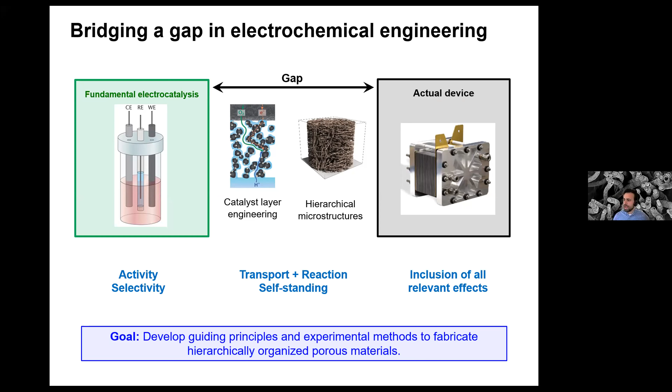That is a problem on a length scale where chemical engineers feel very comfortable. Our goal is to develop guiding principles that would allow us to fabricate and characterize porous materials for next generation electrochemical systems. The polarization curve is the typical footprint of an electrochemical reactor. Tom was particularly discussing the kinetic overpotential. Theoretically, we would have a thermodynamic voltage called open circuit voltage, but in reality, as our current increases, the cell will experience certain inefficiencies or losses. In electrochemistry, we like to group them into three categories.

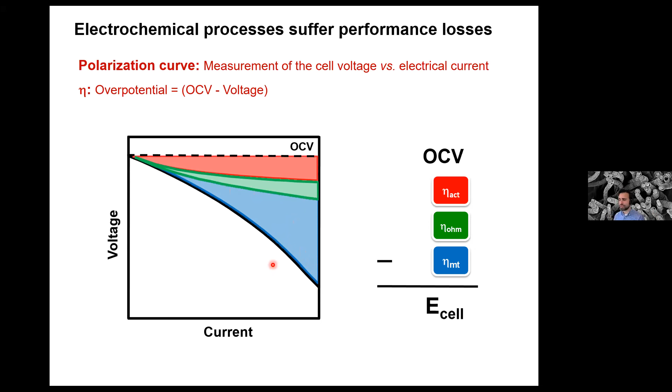The first one is activation overpotential, related to electrochemical kinetics, so surface area and activity. The second one is ohmic, which has to do with ionic conductivities in your cell and also electronic conductivities, contact resistances, conductivities in solids. And last but not least, mass transfer overpotentials. Those become very relevant at very high current densities. There, the porous electrode plays a crucial role because it should distribute reactants at the same time that it is removing products. So there is a lot of interest to develop three-dimensional electrodes and coatings to control mass transport.

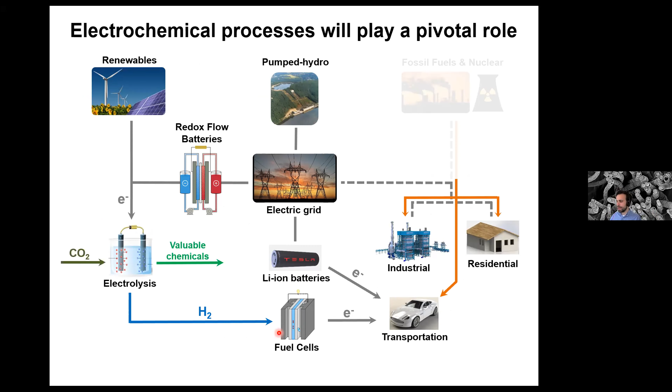And really the vision is this one. You're all familiar with it, so I will not spend time: integrating renewables through large-scale energy storage, electrochemical conversions, and use in transportation sectors. Today I want to tell you three very short stories of how we can engineer porous electrodes to enhance the performance of electrochemical systems. I will first start with an example of low temperature fuel cells, because a lot of the science and engineering developed for fuel cells is much more mature than the science being developed in CO2 electrolysis.

And I think there are a lot of interesting ideas that can be repurposed from fuel cell technology into CO2 electrolysis. I will tell you a very brief story of our recent efforts on CO2 reduction, particularly on thinking about how to make gas diffusion electrodes. And last, I'll tell you a brief story about how to control 3D porous structures for redox flow batteries.

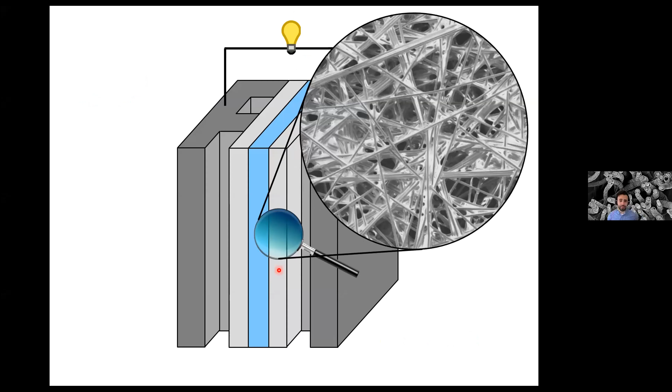Okay, so let's start with the first story. And before I start, I wanted to remind you how a polymer electrolyte fuel cell works. In the anode, we have hydrogen gas. In the cathode, we have oxygen from the air. And we produce water, electricity, and heat. Now, the problem is that on the cathode, at high currents, you produce a lot of water. And this water has to leave the cell at the same time as the gases are coming into the catalytic area. So that is what we call mass transfer limitations.

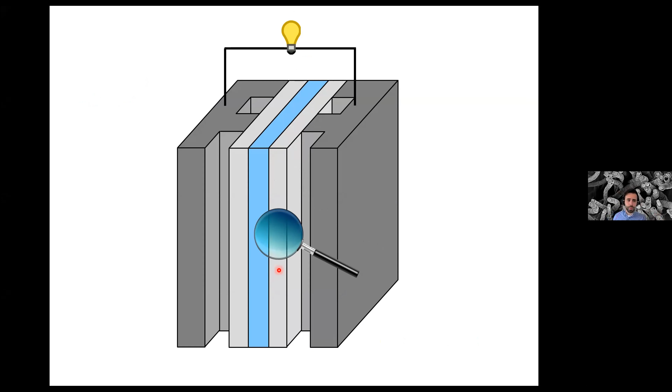And it's a very relevant problem, a very important problem in fuel cells called water management, but also in electrolysis, if you think about bubble management. And if we think about CO2 electrolysis, if we want to generate, for example, organic products, I suspect that this will also become a problem in the near future, particularly if you want to go to high currents.

So on the cathode, what we have is typically a membrane, then a catalytic layer here, and then we have these gas diffusion layers or gas diffusion electrodes that I'm sure you're all familiar with, which are composed typically of carbon fibers and then a hydrophobic coating, typically PTFE, Teflon, yeah? And the reason why you put in a hydrophobic coating is that the water or the products can come out as quickly as possible.

Now we know from experiments and theory that the water at the micrometer scale will follow these tortuous paths, which are determined by the material microstructure and the local surface chemistry. Now, in chemical engineering language, this is what we call decreased effective diffusivity, because the gases are forced to travel longer distances, increased tortuosity, right? So how can we rethink this problem to try to channel the water and the gases in a way that they follow straightforward pathways at a micrometer scale?

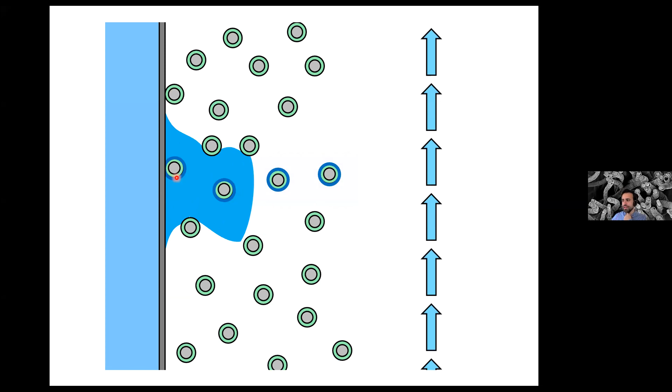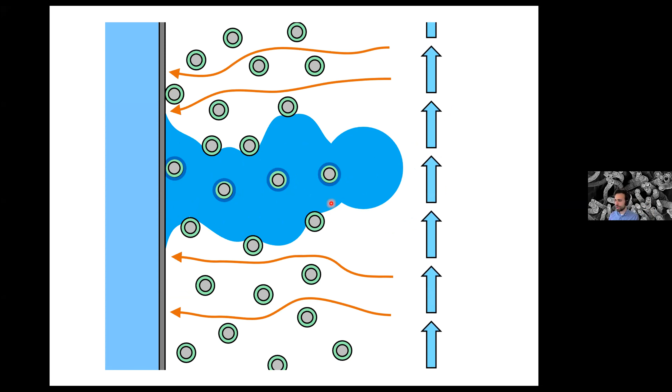And that is really what we've been thinking about for some time: can we change the local wettability of these gas diffusion layers or gas diffusion electrodes to force the liquid product, in this case water, to travel through these straightforward pathways? And as a consequence, the remaining areas will stay dry for the transport of gases, okay? So this is a fundamental problem. The fundamental challenge is really controlling multi-phase flows at a local scale. And how to do that, that's challenging because it requires modifications of contact angles and wettability through thick materials.

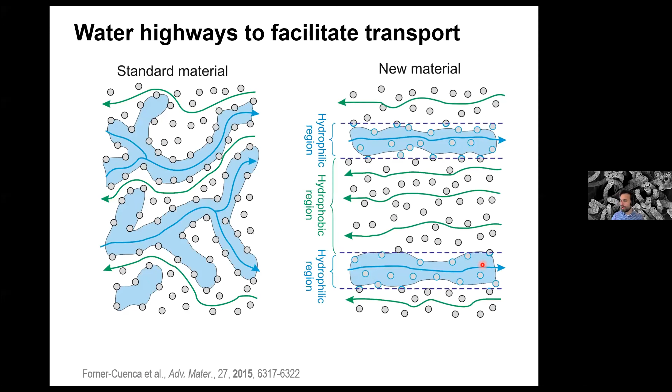And this is the only equation I will use today, which is the driving force for a liquid product when there is a gas counterflow, the capillary pressure, that can be calculated as 2 times the surface tension multiplied by the cosine of the contact angle, and the contact angle tells you something about the wettability. So a contact angle higher than 90 is hydrophobic. Contact angles lower than 90, that is hydrophilic. And it also depends on the pore radius. So as we would logically expect, the water is going to preferentially fill the pores that are hydrophilic and that have large radius, okay? Because the capillary pressure is lower.

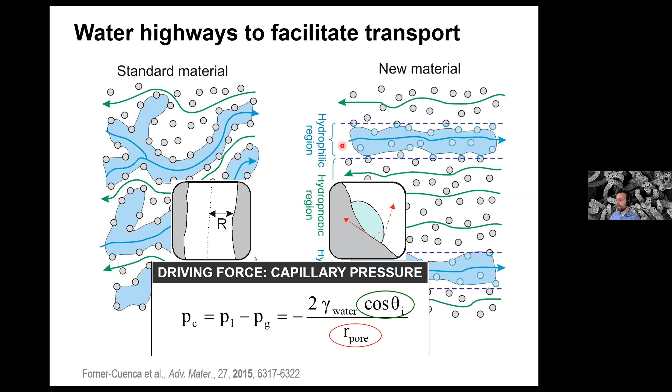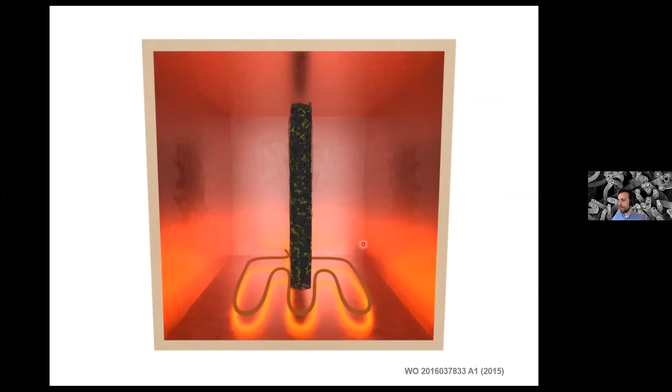All right, so we were determined to essentially modify the contact angle, and how do we do that? So we begin with a carbon fiber substrate that is a conductive scaffold. I'm sure that you're familiar with these carbon fiber substrates. And first, we coat it with a hydrophobic polymer like Teflon. And you expose that to a thermal treatment so that you can evaporate the solvent and sinter the polymer. Now, this is traditional state-of-the-art hydrophobic GDEs.

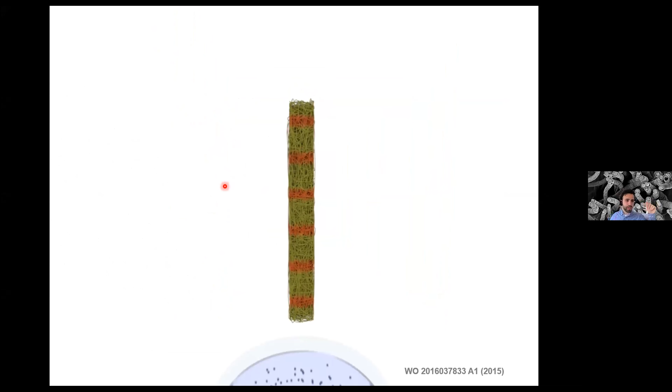And the new step is that we expose these materials to an electron beam using masks that have a predefined pattern so that the radiation can go through some slits. And next to that, we immerse this material in a solution of hydrophilic monomers. And that way you end up having a material that has structured hydrophilic and hydrophobic domains through the entire thickness of the material. And that's why we use electrons, because they have the ability to go through the entire thickness.

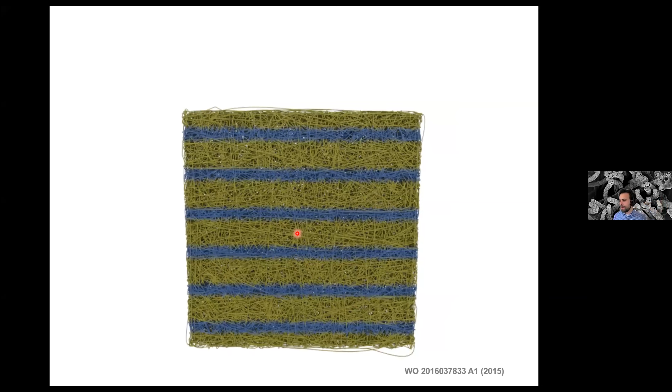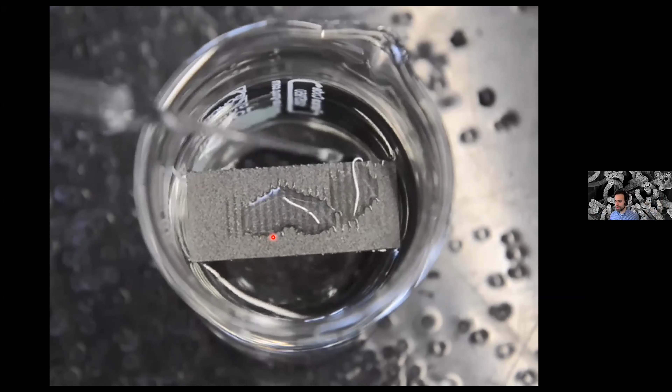Now, for those of you who have played with GDEs, you know that they are very hydrophobic. The water doesn't want to stay on the surface, it rolls off. And you can see how these materials look. You can essentially wick in the water through these patterns. All right, so very briefly about the chemistry, we used N-vinylformamide, which is a monomer that polymerizes after electron radiation. This happens at low temperature, 70 degrees.

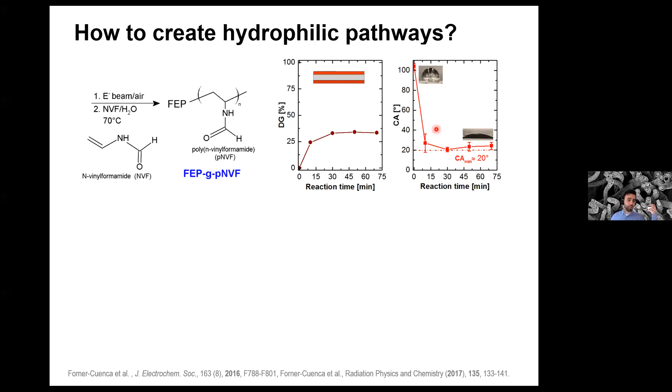And after a very short time, only 10 minutes, you have already decreased your contact angle that was initially 100 degrees all the way down to about 20. So you turn a very hydrophobic surface into a very hydrophilic surface.

So we have a proof that there is some sort of chemical pattern, that there is some chemical modification on the surface. But we wanted to see what the transport characteristic looks like. And for that, we perform a capillary pressure experiment. So this is a microfluidic cell in which we pump water through a channel.

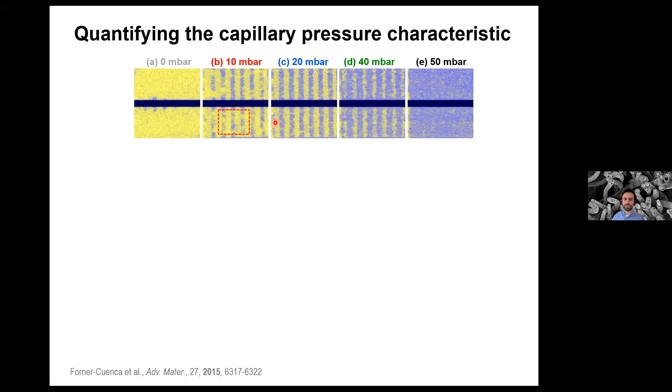And we control the capillary pressure precisely and visualize using neutron radiography where the water is located as a function of the pressure. That allows you to build these graphs of water saturation as a function of position that ultimately allow us to calculate these saturation as a function of capillary pressure plots. And this is a lot repurposed from the field of oil and gas, right? So thinking about displacement of fluids in a porous material.

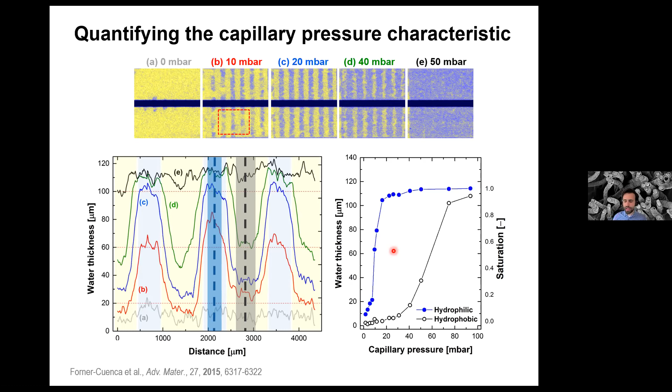And what you learn from these curves is essentially that at a very low capillary pressure, the water will fill the hydrophilic regions. And then at a much larger pressure, the water will fill also the hydrophobic region. So the separation between these two lines will tell you something about the quality of this pattern, the segregation of this pattern.

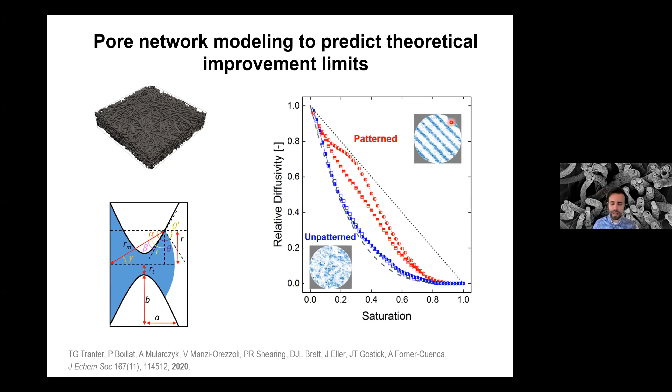So it does make physical sense to go from unstructured wettability materials to materials with patterned wettability. And three-dimensional modeling can help you inform the development of materials. But the final effort was, of course, to put these samples into a fuel cell and measure the electrochemical performance. So like I said before, polarization curves at different conditions.

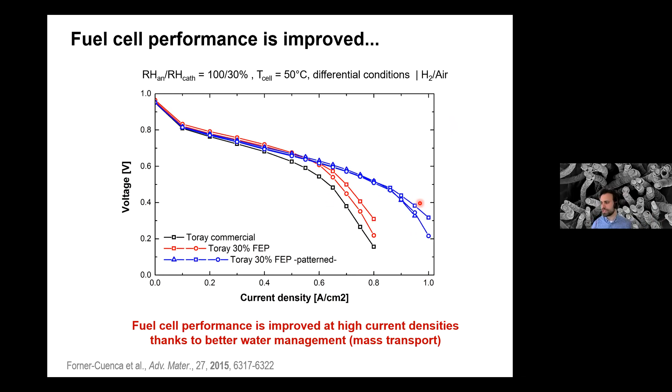And what we see is that comparing the blue, which is the modified material, with the red, we were able to see that the mass transfer overpotential is lower in the case of materials with patterned wettability. And so we attributed these improvements in performance to a better water management. And we did a lot of neutron work to learn where the water was going in operando. And this is what I'm trying to explain here.

I thought this technique might be interesting also for some of you looking at electrolysis. And the idea of neutrons is the following. So with X-rays, we are all familiar. An X-ray will tell you essentially where the bones are, and the water is nearly transparent, so it attenuates very little. With neutrons, it's quite the opposite. So if you have a robot, a metallic structure, neutrons will go through heavy elements without attenuation, and it will give you signal about the water that is underneath.

And this is, of course, just a sort of joke representation, but the idea is that every electrochemical cell is composed of metals and carbons and polymers, and that is all nearly transparent for the neutron beam. And what you can see inside are lighter materials such as water, lithium, boron, and that's why neutron radiography is a very powerful technique to look at, for example, multi-phase transport. Okay, and that's what I do here.

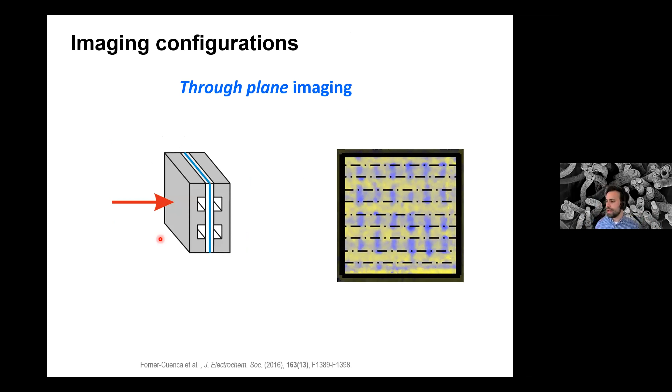I look at the fuel cell during operation, and I can differentiate and see water locations under the ribs and under the channels. So it allows us to do a local quantification of the water distribution. And we couple that with in situ performance. So we build that in the beamline. You can put your fuel cell and you can look at it and you can quantify.

So it's not only qualitative, but you can quantify local water compositions or saturations in the porous media as a function of the operating condition. And here I'm showing you an example at 2 amps per square centimeter, where we compare a baseline material in black with a material that has patterned wettability in red.

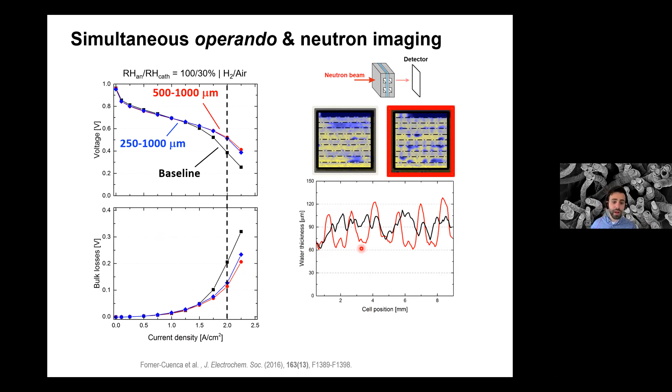And you can see that the water preferentially locates on these hydrophilic patterns that we created before. So the interesting thing here that we learn is that the total amount of water is about the same. So it's not that by making hydrophilic patterns, you get less water in your porous media. You get about the same total amount of water, but what changes is actually the distribution of this water.

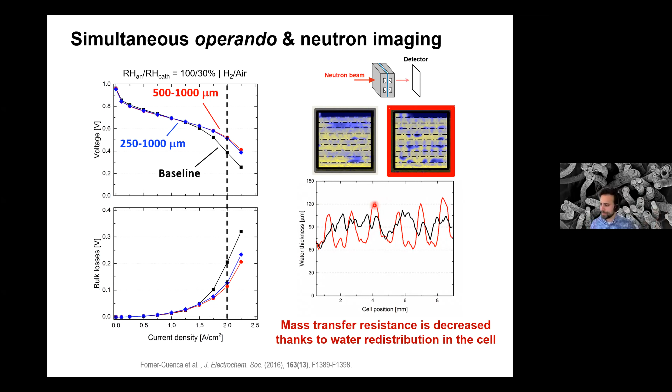And if you have 30% of the area fully saturated, but 70% nearly empty, that would already give you a fundamental advantage in terms of mass transport. Okay, and another exercise where you can use neutrons, and the reason why I put this here is because I realized that the work on CO2 electrolysis is going in this direction, which is beginning to use microporous layers, changing temperature as well. So here you can see the water distribution at 70 degrees and with a microporous layer.

Here is when we remove the microporous layer, we can see that the water segregation gets even clearer. And when we go to lower temperature, you can see more condensation. And as a consequence, there is an even more clear segmentation between hydrophilic and hydrophobic. Okay, and with that, I conclude my story about fuel cells. And hopefully, while fuel cells and CO2 electrolyzers are different, that can stimulate some ideas on how you can tackle the design of gas diffusion electrodes.

With that, I want to move briefly, this would be just 2 minutes, to gas-fed CO2 electrolyzers, which is, I presume, the interest of many of you in the audience. And I think you all understand the motivation of moving from flat planar electrodes in thick liquid electrolytes to gas-fed CO2 reduction, as that allows you to have thinner diffusion layers, and also not being limited by solubility limits in the liquid electrolyte. And what we are basically doing in the field now is repurposing a lot of the knowledge that has been developed for fuel cells. So a lot of the GDE concepts that are used now based on carbon fibers and microporous layers were derived from fuel cells.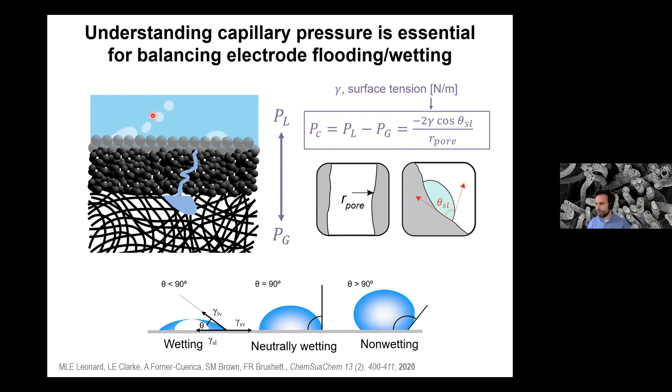But now when you move to CO2 electrolyzers, and particularly if you are interested in producing organic products, so think about formic acid, methanol, ethanol, propanol, all these materials have much lower surface tension than water. And as a consequence, the contact angle and the capillary pressure characteristic will change. And here we wrote a paper a few months ago where we tried to highlight that problem, which is, what is your operational envelope that allows you to produce a certain product without flooding a gas diffusion electrode, at least a current generation gas diffusion electrode.

And you can see that your window is pretty narrow, particularly when you move to these higher carbon atom alcohols like propanol, where with very tiny concentrations of propanol in water, you would already break through and flood your gas diffusion electrode. So that makes us think, how should we be designing gas diffusion electrodes for this particular system? And I think that is going to require new concepts for controlling the 3D microstructure of the material, but also, frankly, for controlling the surface tension, new coating chemistries, new coating concepts, and so on.

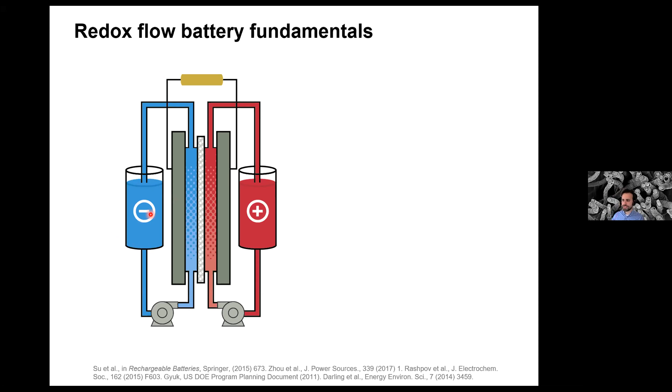Excellent. I will go very briefly through that, but I thought that some of the microstructural work that we're doing in flow batteries could also be interesting for CO2 electrolyzers. And a flow battery is nothing else than an electrochemical reactor, like a fuel cell or an electrolyzer. The only difference is that now the tanks are reversibly charged and discharged. And essentially, there are several components. One of them is the liquid electrolytes or liquid dissolving tanks.

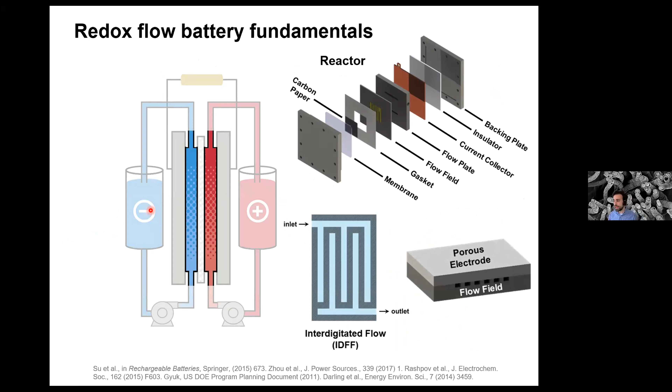And then you have your electrochemical reactor that looks a lot like a fuel cell or an electrolyzer, with your membrane in the middle, with your flow fields or fluid dynamic elements, and finally with your porous electrodes in between. And so we have been thinking now for a long time about how to design porous electrodes, and particularly how to control this complicated mass transfer problem, which is you have to provide diffusion, convection, migration, and also electrochemical reactions within this 3D structure.

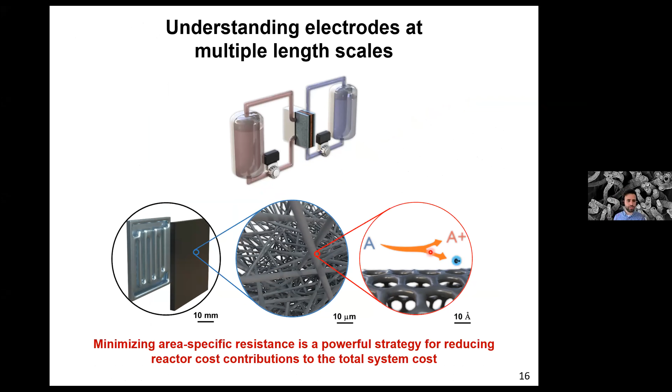So there is a lot of interesting science to be discovered there. And then, of course, if you're an electrocatalysis person, there are a lot of interesting problems as well happening at the interface. So very briefly, what we are interested in is how does the 3D structure of the material influence its performance? And we have looked at different non-woven materials, and we have also looked at a woven material, so material that is like a fabric, like a textile, really.

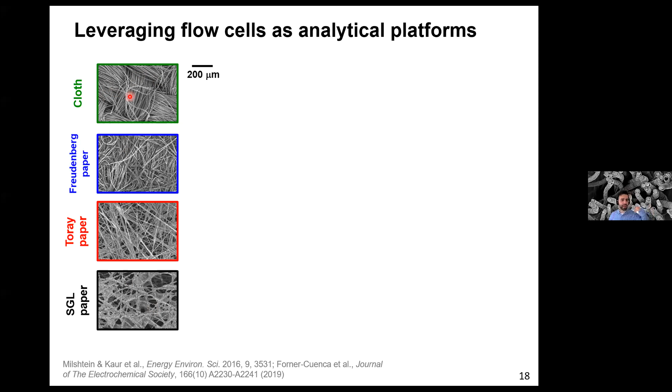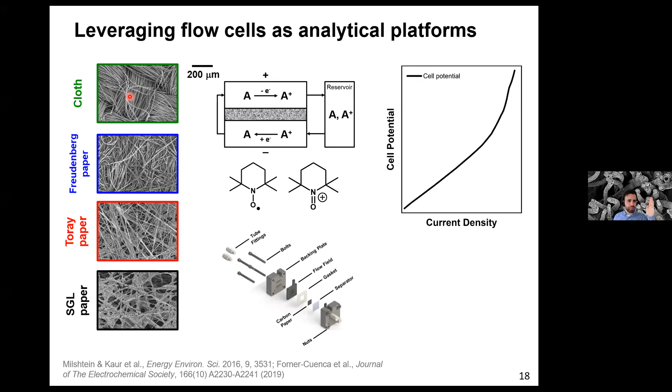And we've used model platforms to try to deconvolute what is the role of mass transfer. So we want to know the mass transfer overpotential as a function of the material type, okay? And by doing that, we realized something really interesting, is that all these non-woven electrodes, they kind of collapse through the same trend line that give you moderate current density, and they take quite a lot of pressure drop to pump the liquid through.

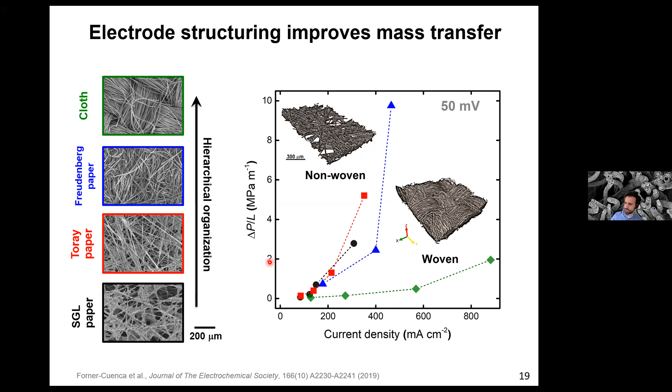However, when you move to these woven, these are very well-organized materials with aligned channels, with large pores and small pores, so bimodal pore size distribution, you get the best of both worlds. So you get very high current densities at the fixed overpotential, and you also get low pressure drop. So we got very interested in these materials, and we collaborated with the University of Surrey to try to understand, using three-dimensional modeling, what are the reasons why these materials actually work so well.

And one of the things that you learn from the modeling is that if you have a material that has, like, for example, this SGL paper, that has a poorly defined microstructure, that might be beneficial perhaps for fuel cells or electrolysis. But in this particular application, what we see is that the material performs worse than this cloth in a flow battery. And the reason we believe is that you have these big pathways here that give you high electrolyte flow velocity, and then these stagnant areas over here where there is essentially 100% conversion.

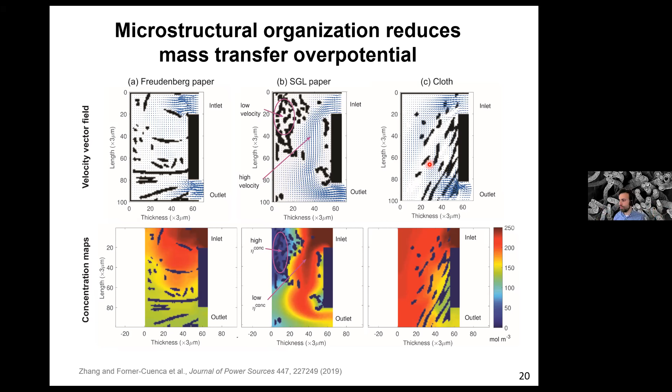So your electrochemical reactor is actually underutilized, right? You have big areas of the reactor that are not producing any current, and some small areas that are producing all the current. And that is a situation that is suboptimal from a mass transfer point of view. When you go to very aligned pores, hierarchical structures, then you get the best of both concepts.

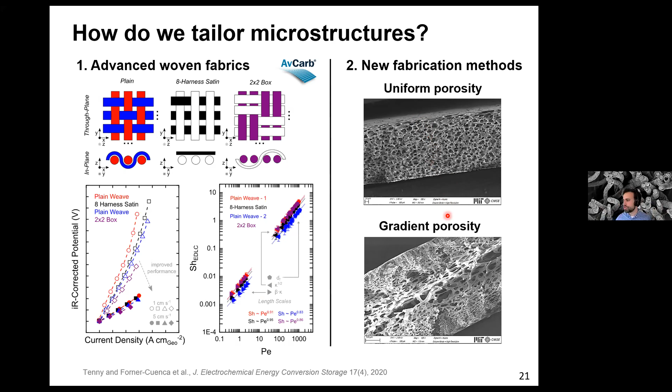So anyway, the last thing that I have is that we are now developing our own scaffold, so our own 3D structures for use in flow batteries, but also for use in CO2 electrolyzers, for use in fuel cells. So we want to control from the bottom up the microstructure, and we want to be able to make structures that have either isoporous pore size distribution or porosity gradients, or bimodal or trimodal pore size distribution. And what we use is a technique that was developed for membrane materials, actually.

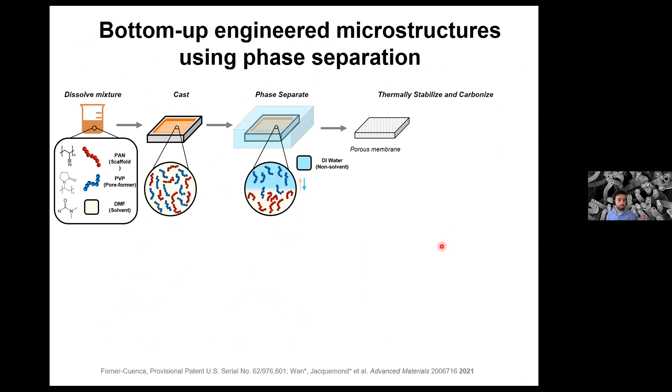So non-solvent induced phase separation is a very facile method in which you have a polymer solution, you cast it on a mold or on a glass plate, and then you immerse it in water to create the separation of the two phases. Ultimately, you end up with a porous membrane or a porous scaffold that you carbonize at high temperature to produce the conductive electrode.

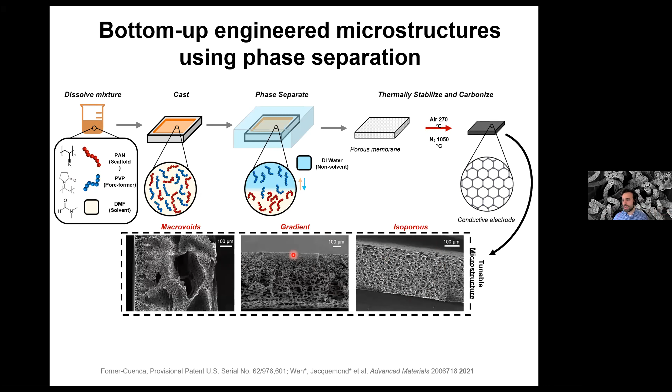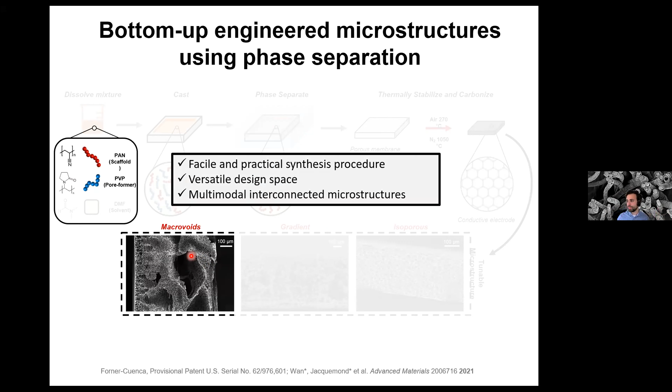And by changing a few easy parameters, we were able to produce isoporous structures, structures that have a porosity gradient, and structures that have these big pores, these macrovoids. And we think these are desirable properties for electrochemical systems based on the theory that has been developed in the field. So we just tested this material that resembles sort of a honeycomb, because it has these big pores through plane, and then it has these small pores in between.

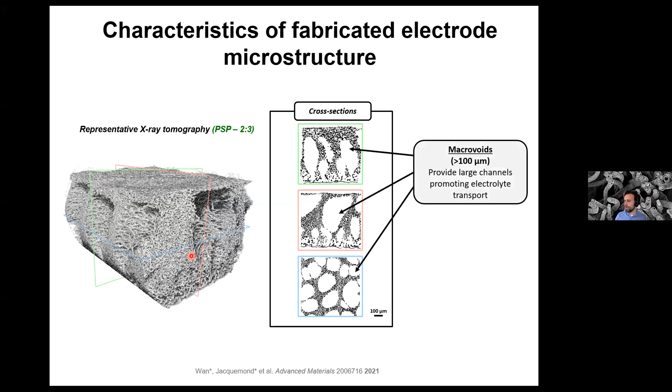We tested these materials in flow batteries recently, and we were able to see, this is particularly for an iron chemistry, that the performance goes up by a lot. So the overpotentials are reduced, and there is a lot of work on optimizing the surface chemistry that needs to be done, but the starting point is already very interesting. So if some of you have ideas on how these materials could be integrated in CO2 electrolyzers as well, I would be happy to hear and potentially to discuss collaborative efforts.

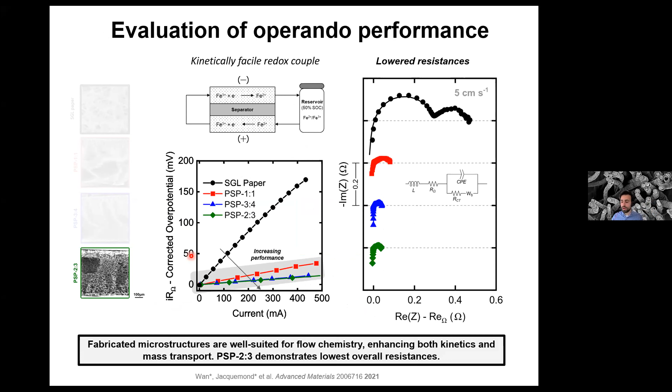And with that, I conclude my talk. Thank you so much for your attention. I hopefully convinced you that engineering porous materials can unlock next generation electrochemical systems. And I gave you an example of controlling local wettability, so how changing the contact angle allows you to have higher mass transport. I told you another example of thinking about flooding and material durability. And a final example of controlling the three-dimensional structure to improve flow battery performance.

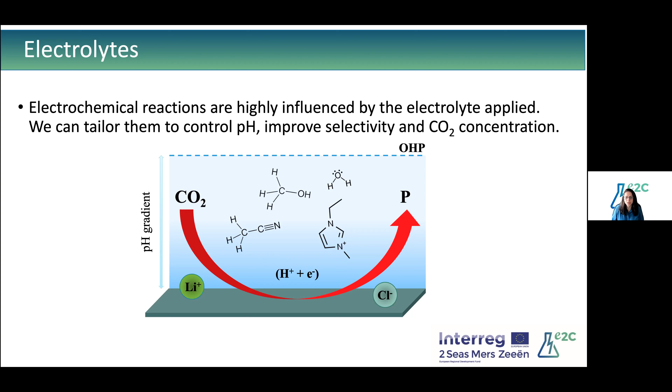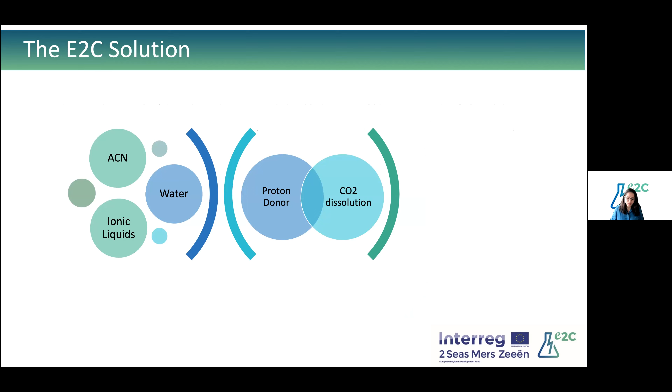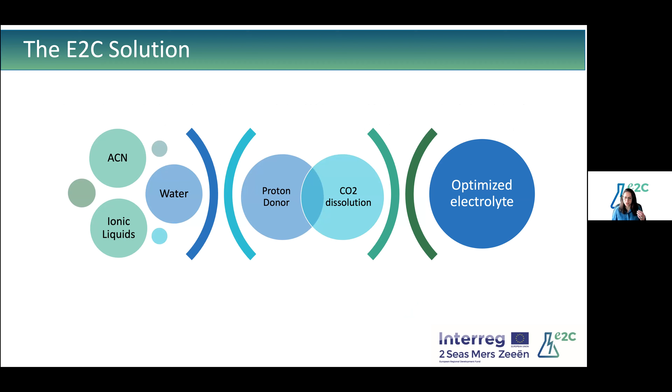So for the E2C solution, we're proposing a mixture of acetonitrile, water, and ionic liquids. The goal here is to tailor the proportion of proton donors in the system and the availability of CO2 in the system as well by improving its dissolution. Ideally, we're aiming to reach an optimized electrolyte, which would have the perfect proportion between proton donor and CO2 dissolution in the system.

Before the results, I'd like to show you a little bit how the research is actually done. So we're using a flow cell. This flow cell is a sandwich structure that contains a working electrode, a counter electrode, and a membrane separating the cathode and the anode chambers. The entire system is linked into a GC. So while we're running the experiments, we're doing online reading of the gas products, and we have a constant flow of CO2 coming into the system, which keeps the CO2 concentration in the system stable.

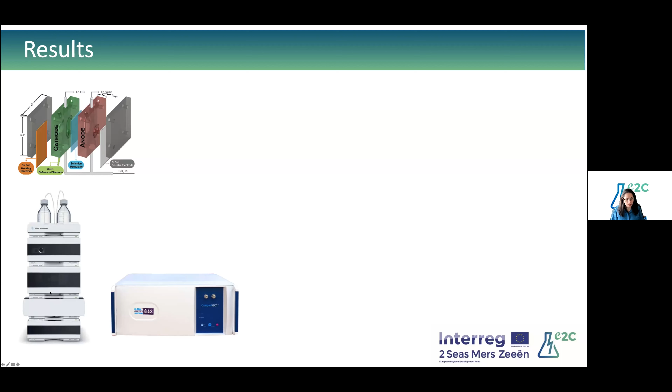As I said, the system is hooked up to the GC, which leads us to an online gas chromatography analysis. After the reaction is finished, we carry out a sampling of the liquid products and run it through HPLC. So to see the results, I'll be looking at a chronoamperometry, which is basically the experiment where you determine a potential, apply it for a certain amount of time, and carry out the analysis of the products you obtained. These products go through Faradaic efficiency calculations, and we estimate in percentage how much of the electrons used during a reaction went to produce one product or another.

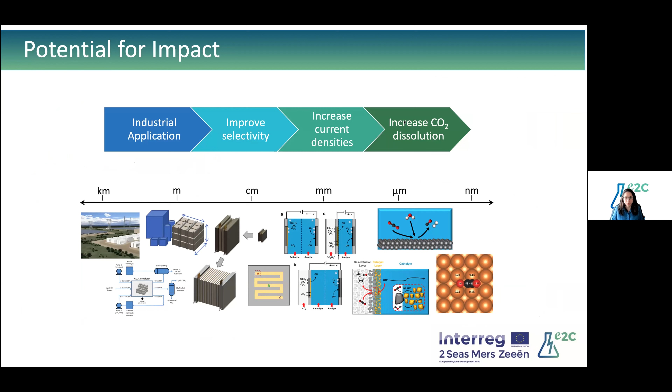The potential impact of this research is that industrial application of electrochemical reactions is mostly hindered by selectivity and current densities, and these can be addressed by proposing different electrolytes, which can promote selectivity and increase the dissolution of CO2. The team is working in close collaboration with VITO, TNO, and Antwerp. We're doing the electrolyte analysis, while the other institutions work on development of the cells and the catalysts. The major takeaway of our end of the research is that electrolytes have a very large role in influencing CO2 reduction performance. Ternary mixtures are a good candidate to improve this production, and we can reach an industrially viable system if we tune the electrolytes in an easy and low-cost manner.

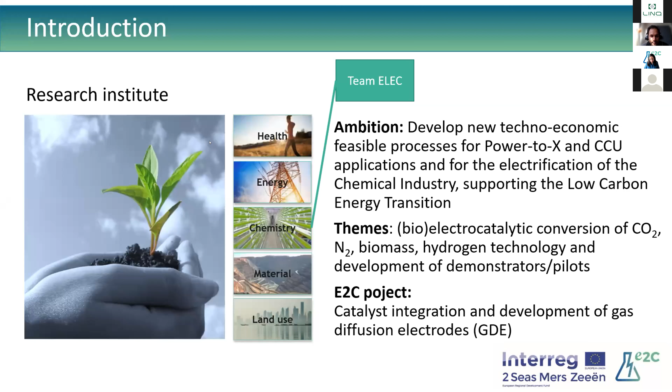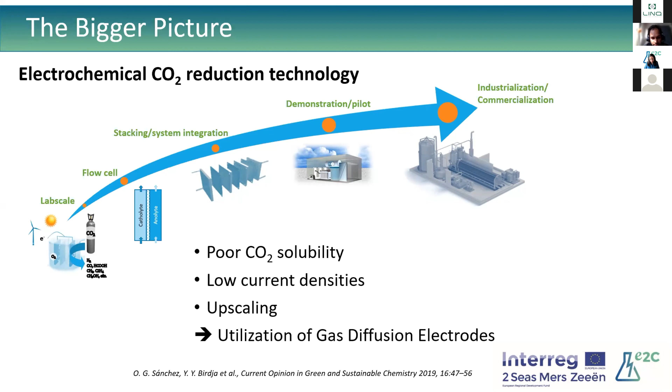We all know the bottlenecks of CO2 reduction: the poor CO2 solubilities in the half cells or the H cells, low current densities, and upscaling stability issues. For that, we will use gas diffusion electrodes in this project. So going to the next slide. As I mentioned, we work on the design of gas diffusion electrodes and the electrocatalyst integration. As already shown before by Toni, the gas diffusion electrodes, you have a gas diffusion layer, a hydrophobic layer, the gas side and the liquid side, and your catalyst is somehow integrated on that gas diffusion layer.

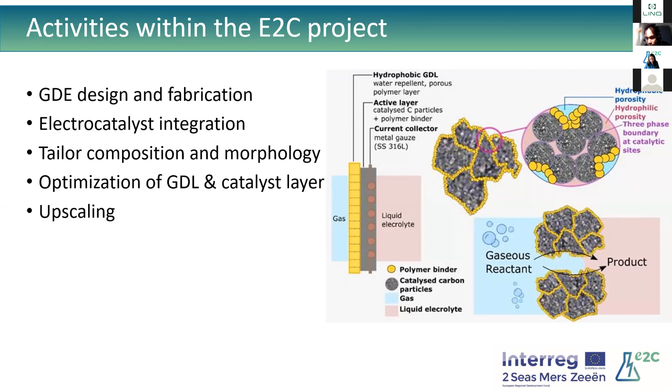What we do in this project is we try to study the composition of this gas diffusion layer together with the catalyst layer, trying to optimize the morphology and to upscale to larger electrodes. Next. So some key achievements and results. First, on the gas diffusion layer itself. So without any catalyst, we make some gas diffusion layers ourselves. We tested them, characterized them, mainly the water permeability, the pore size, the mechanical robustness. We compared with commercial gas diffusion layers, and compared to those, we had quite better performance, I would say, in the sense of lower water permeability and smaller pore sizes. Of course, that's not everything, because this is still without any catalyst.

So when we integrate a catalyst, there are, of course, several possibilities. I will not go into details here, but we worked on a tin electrocatalyst, and that's because the focus in this project is to work towards formate. And we developed a methodology to increase the amount of tin active sites and incorporate it in a homogeneous way in the gas diffusion layer, which realized relatively high current densities, around 250 and 500 milliamps per square centimeter, and also reasonable Faraday efficiency, 60 to 80%. Currently, we are working on other electrocatalysts. And if you go to the next slide,

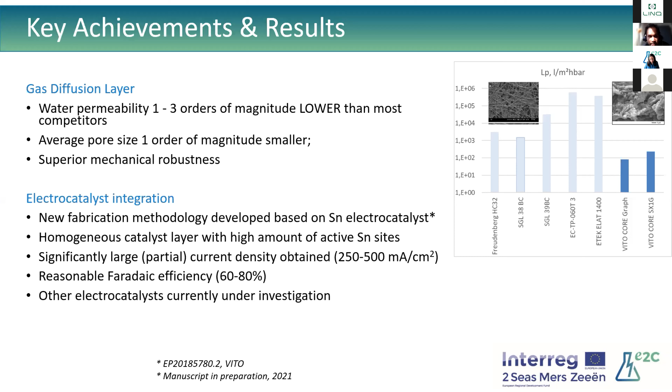In this project, we will look into the possibility of stacking the different electrodes, and we will collaborate with the University of Antwerp, where they make the electrocatalysts, and we integrate them in the gas diffusion electrodes. So the most important impact from this project is the demonstration of the direct CO2 reduction technology. Next.

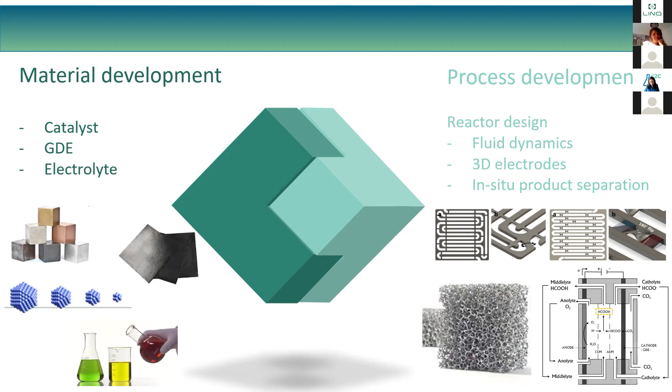So we also work on increasing the active surface area of the electrodes without paying the price of needing to have bigger reactors. So for instance, we use these 3D types of electrodes. And we are also looking into different solutions on how to directly separate the product formed from the reaction stream. So for instance, in this project, we are using this 3-compartment electrolyzer where the formic acid formed is separated in situ inside the reactor. And besides the reactor development, next slide, please.

We are also actively looking into the entire value chain, so from the upstream to the downstream processes. So yeah, we ask ourselves questions like, how can we integrate the CO2 capture with the CO2 utilization in one single process? How can we integrate the separation and the purification of the product in the system, as I was mentioning with this 3-compartment system? But also questions like what are the needs of the industry, or how is the target electrochemical product going to be used. So for our research, we try to adopt a process integration approach where we consider the interaction between different units, and we try to optimize the whole system rather than optimizing them separately.

So for this project, we are currently developing a pilot demonstrator, which will help us in our quest to find the ultimate CO2 conversion process and bring it closer to its real implementation in the industry. And yeah, for all these questions and requests we always have a common denominator, and it is how can we make this entire process economically more attractive.